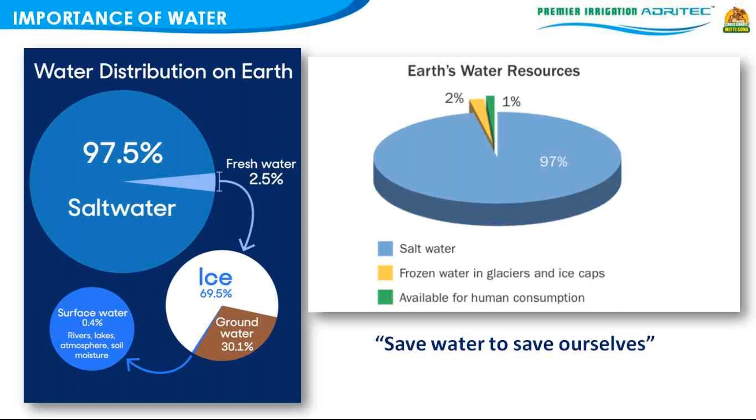So it becomes very important that we have to save water to save ourselves. This slide shows how little water we actually have. We have a lot of salt water, but can they be used? They cannot be used - we have to desalinate it, and it is a very costly process. So what we are trying to say is that the available water is very, very minuscule.

So what is the challenge now in water availability? As you can see from the map of India, in the Indian context, we find 54% of India faces very high to extreme high water stress. You can note down the various baseline water stress figures - this is sourced from the World Resources Institute. You will find that many states are in the extremely high category of water extraction, meaning the withdrawal of water either by tube well, bore well, or any other way, for drinking water or for irrigation.

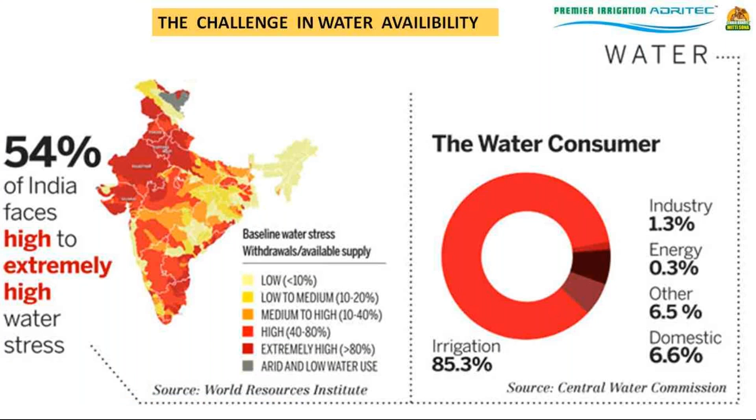When we look at who is the major consumer of this 1% water, you will find that irrigation - according to statistics from the Central Water Commission - accounts for 85%, or 85.3%, of water usage. So again, we see the pressing demand for irrigation. So what is the need of the hour?

I will go back in time and tell you how this whole thing happened. In the year 2003, under the chairmanship of then Chief Minister of Andhra Pradesh, Chandrababu Naidu Garu, a task force committee was set up for a Vision 2020, and it was thought that we should have a smart use of water - which is now very fondly called the Pradhan Mantri Krishi Sinchayee Yojana. So basically, the objective is that the available water has to be used very smartly.

On one side the population is increasing, and by 2030 India's population will overtake China. So the increasing need for food will also be very high, and the availability of water is coming down. These are contrasting situations. From the same given piece of land, I will have to increase my agriculture, give inputs, and also deal with the problem of power and labor, which all of us know.

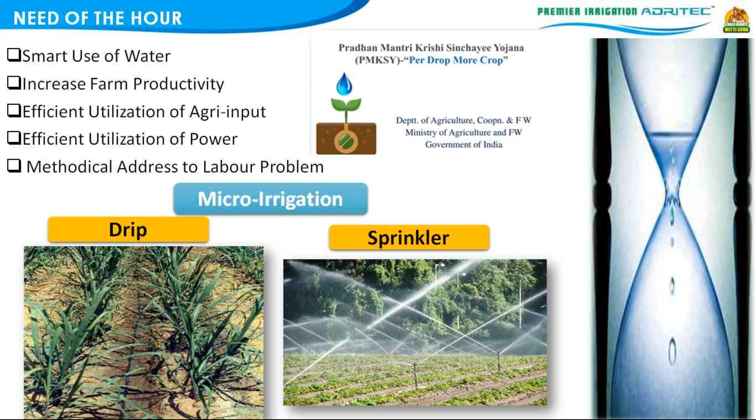So the government of India, under this scheme, decided that unless we use this water very carefully, we need the scope of micro irrigation. Micro irrigation is a very broad term which broadly covers drip and sprinkler irrigation. So this is the context of the whole need of the hour that is there today.

Now I will take you through the simple definition of irrigation. All of us are aware how water is lost from the plant. There are two basic processes, which we have all learned in 7th or 8th standard biology, by which water is lost.

One is transpiration, which happens from the leaves of the plant. There are small openings called stomata under the leaves, and water actually goes out through them. On a sunny day, the water is getting transpired, and surrounding the plant, from the soil, there is evaporation. Both of these put together is classically called evapotranspiration.

So basically some amount of water is going out, a major amount from the leaves, and water is lost from the soil. Put together, this is called evapotranspiration. This is the water that is going out.

Now the question comes: where do I give the water? Do I irrigate the soil, or do I irrigate the roots? The answer is of course obvious, that we have to irrigate the roots. That is the whole context of creating a water balance.

In a country like the UK, where you have rainfall for 10 months in a year, rainfall will take care of irrigation needs. But in a country like India, where rainfall is there only in the two prominent monsoons, we have a very short gap of 50-55 or 60 days, within which, of course, there are exceptional years, and we have to maintain this balance.

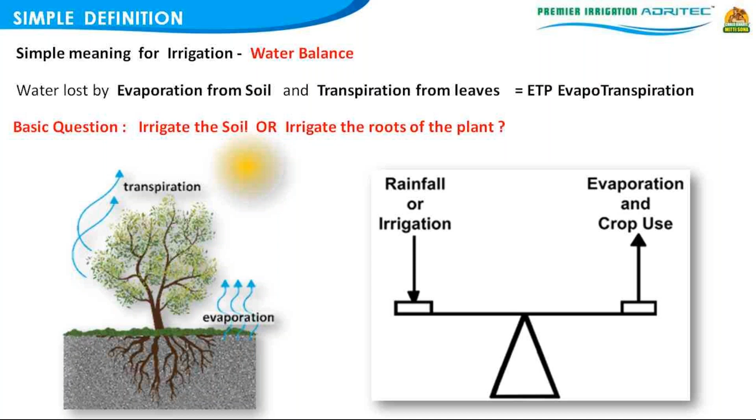So basically in irrigation we have to take care of the needs of the plant - whatever water is going out has to be given back. The plant cannot talk, so we have other indirect methods of finding out how much water is actually required by the plant. Now let us see what are the various irrigation methods and why we should adopt micro or drip irrigation.

There are many types of irrigation, but I am going to cover the main 5 which are very popular across the globe. I have left out pivot irrigation because it is not relevant to India as of now, except in a few places. The first most commonly adopted method is flood or surface irrigation, followed by sprinkler irrigation, then rain gun irrigation, then small devices called micro sprinklers or spray jets, and finally drip or trickle irrigation.

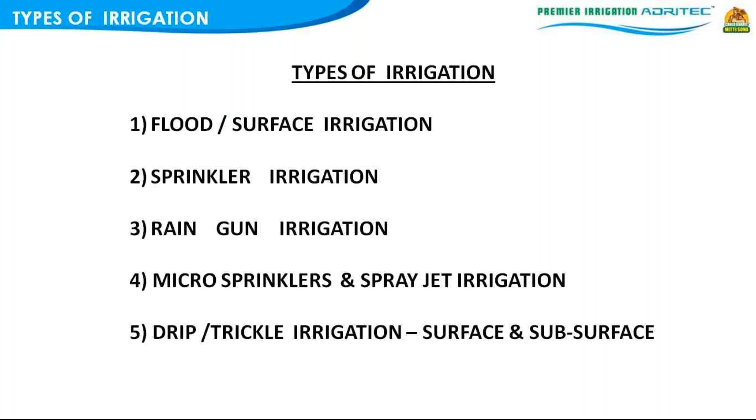This drip irrigation can either be laid on the surface, or it can be laid below the soil, 4 to 6 inches deep, depending on the active root zone.

So let us look at flood irrigation. The picture is very clear - there is a plant, and in the first one you are ponding the water around it. It is the common notion of anyone to think that the water has to be ponded around the plant.

Here the water is getting fully filled up in the basin, and you know the roots also have to breathe. So if you fill up the entire area with water, the water is actually ponded - you are giving it excess water. It's like a human being being asked to have an entire week's food in one day. Even here, when you look at the sugarcane field, you will find the entire area is being flooded. So what is happening over here?

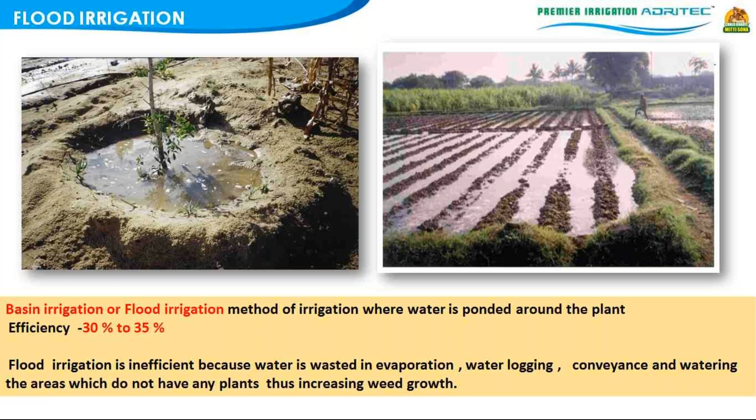You are wasting a lot of water by making it go through all these channels, by waterlogging, by deep percolation. What are the problems associated with this? First, you are wasting water, and you think the plant is getting a lot of water, but it's not getting a lot of water unless there's a balance between air and water space in the soil, it won't be able to take up the water. This also leads to a lot of weed growth, so when you do flood irrigation, you are also giving water to unwanted plants.

Next is sprinkler irrigation, a very important method popular worldwide. If you ask me which is the number one method of irrigation in the world, even today it's surface irrigation or gated methods. Second comes sprinkler irrigation. In this method, sprinklers are spaced at a certain distance apart, and the concept is that one sprinkler's water falls onto the head of the other sprinkler, so there is an overlap. The spacing between sprinklers is generally between 40 to 60 feet.

As you can see, the sprinkler has two nozzles: one throwing onto the far end and one throwing around the sprinkler. This method of throwing water for closely spaced crops has been found very efficient. The company I come from, Premier Irrigation, started sprinkler irrigation way back in 1965, and we were the first company to introduce sprinklers for coffee and tea, since a specific type of irrigation is required there, and the sprinkler is able to create what is nothing but a natural rainfall. The efficiency is between 70 to 75%. There's a 20-25% loss in the in-between spaces and due to wind effect.

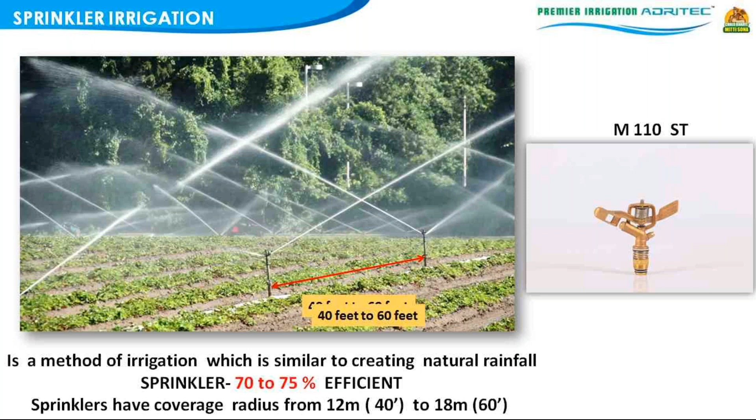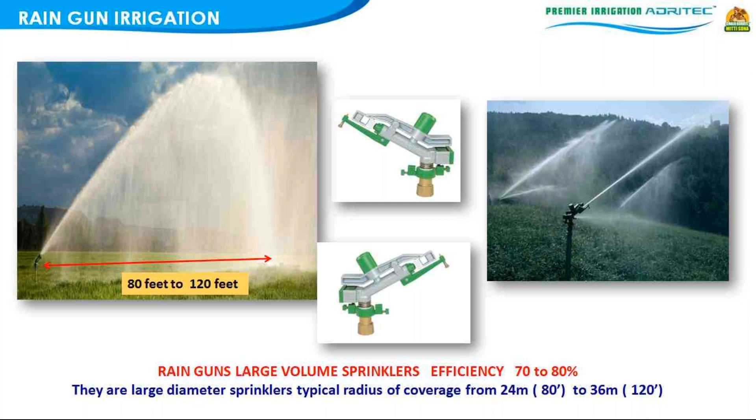Coming to the third method, you have a rain gun. A rain gun is nothing but a big sprinkler, also called a large volume sprinkler, and it can throw water a distance of 80 to 120 feet depending on the pressure available. How much pressure is required depends on the availability of water and the horsepower of the pump. The rain gun can cover an entire area, anywhere between 0.75 to 1 acre at a time, and the efficiency of this system is well designed. You can see it throws water almost in the form of rain, and the efficiency is between 70 to 80%. They are typically large diameter sprinklers, with the radius varying from 80 to 120 feet.

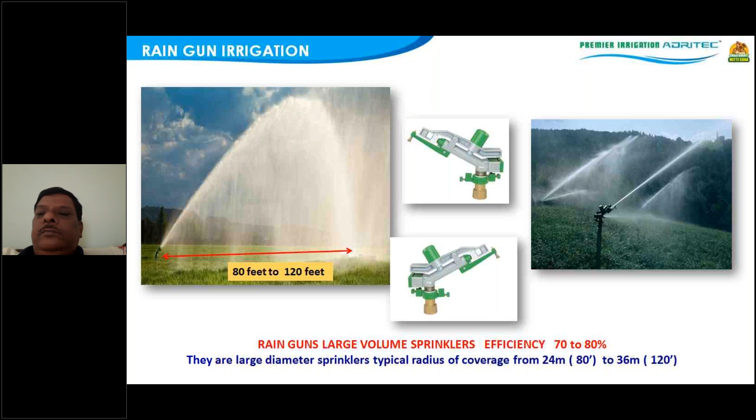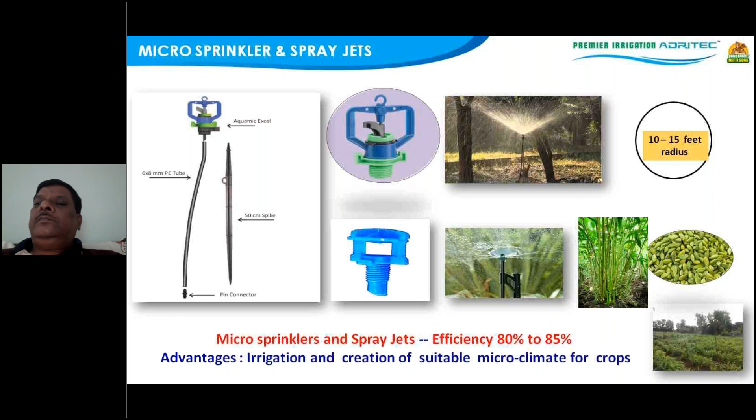Finally, we come to drip or trickle irrigation. As you can see here, there is a tube going in between the rows of vegetables or whatever crop or flowers are there. When the drip tubing is laid on the surface, it is called surface drip irrigation. The efficiency, as you can see, comes from watering exactly where the water is required, giving the water right at the root zone. So the efficiency is between 90 to 95%.

Today the latest in drip irrigation is to take this tube below the surface of the soil, anywhere between 4 to 6 inches. When we do that, even that small evaporation loss on the top is also conserved, and the efficiency can be as high as 95 to 98%. It's like giving an intravenous drip for a patient, where directly the glucose is injected into the system.

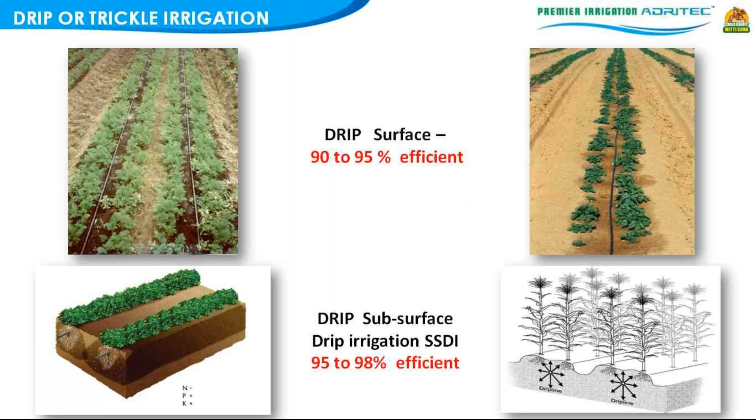So now you may be wondering what all this talk of efficiencies and methods is about. Let us summarize what we have learned till now.

We saw that flood irrigation has 30 to 35% efficiency. That means for every 100 liters of water supplied, only 35 liters has been used, and the balance is wasted. When we take the sprinkler, for every 100 liters, 70 to 80 liters are actually utilized by the plant for its metabolic needs. Rain gun is also between 70 to 80%.

Micro sprinkler is between 80 to 85%, and drip irrigation is around 90 to 95%. So what do we understand from this? Just looking at numbers will not help, so let us do a small math.

Let us take the drip irrigation efficiency as 90%, and compare it with flood. So 90 divided by 30 will be how much? 3. That means if the water available for 1 acre of flood can be used for 3 acres of drip. Let us do one more calculation.

Let us take sprinkler: it's 70 by 35, which will be 2. That means the water available for 1 acre of flood, the same water can cover an area of 2 acres. So this is the understanding of efficiency, and how with very little water, I will be able to irrigate a much larger area. This is the context of the efficiencies.

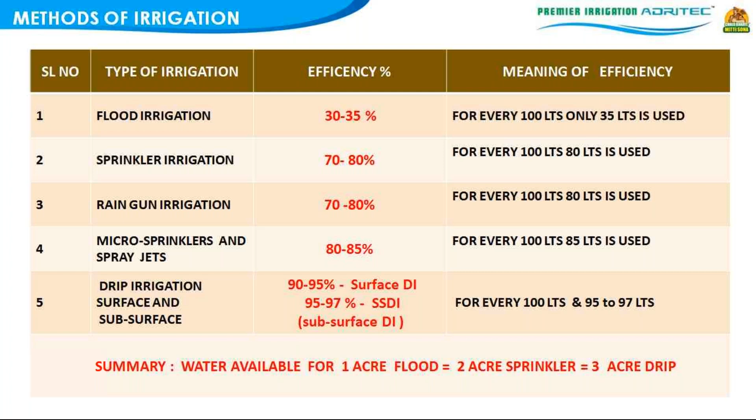Now what is drip irrigation? It is a very precise method to apply water, fertilizer and pesticides slowly, frequently and directly to the root zone of the crop. Please note the words: you have to apply it slowly, frequently and directly to the root zone of the crop.

When we look at the classification, we have two basic types of irrigation system based on the spacing of the crops. The first one is the inline drip irrigation system, which is very common for close space crops. Whenever the spacing is very close, like sugarcane, vegetable, turmeric, cotton, maize, banana, papaya, or even today rice and wheat, on all these crops where the row spacing is very close, we go for what is called an inline.

Inline drip irrigation means there will be a tube where the dripper is co-extruded and manufactured, and the dripper is inside the tubing. This is called an inline drip irrigation system. We have two varieties: the cylindrical type and the flat type of emitters. There are two types of emitters.

Now when we come to the online drip irrigation system, as the name suggests, you will have this tube, and from the tube you take an extension, and then you fit the drippers around the root volume of the crop. This is generally preferred for wide space crops.

You can understand, if I'm going to use inline for a wide space crop like coconut, which is say 25 feet by 25 feet, I am going to water the in-between area unnecessarily, unless I have an intercrop. If I have an intercrop of vegetable, then it is okay, but if not, then I'm going to be wasting the water. So here I will be giving a point source irrigation, called online drip irrigation, which is very common for coconut, arecanut, mango, citrus, pomegranate.

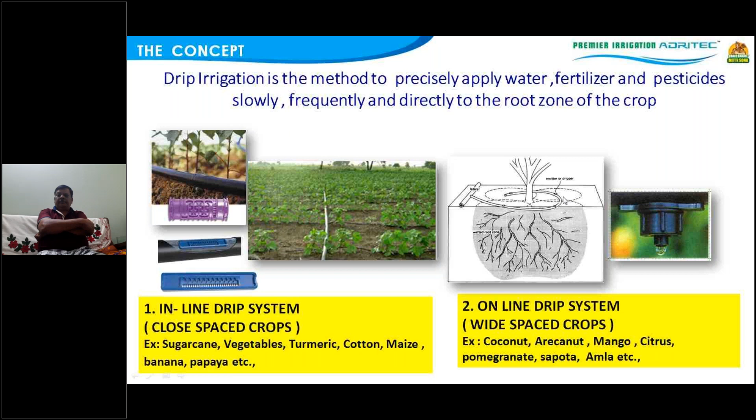So what is the difference between inline and online? Inline means the dripper will be a part of the tubing. Online means you will have the tubing and you will put the emitters separately. Typically anywhere between 3 to 4 emitters are provided.

Now what are the benefits of drip irrigation? First is water saving, second is fertilizer saving, third is increase in yield, then reduction in weed growth, and then energy power saving and infrastructure, which is nothing but manpower saving. Let us look at these by means of simple photographs.

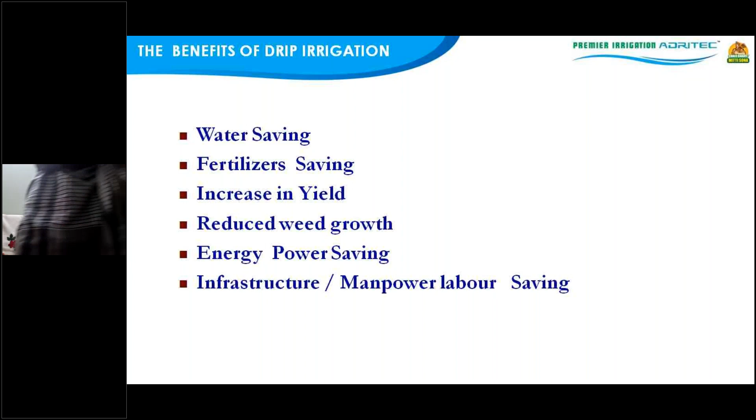So this is the water saving. It has been proved world over, and India particularly is the leading country as far as adoption of micro irrigation after Israel. You will find the water saving is anywhere between 50 to 90%. And you will also note that if you want to take the best advantage of a drip irrigation or micro irrigation system, you will have to apply the water soluble fertilizers also through the drip system.

In the conventional method of broadcasting fertilizer, you are going to throw it even to the weeds or to adjoining areas where it is not required. By applying water, fertilizer and even pesticides directly, the quantum of fertilizer that needs to be applied can be reduced, because in broadcasting there is wastage and you end up increasing your quantity by some percentage. So it has been proved that around 15 to 35% of fertilizer saving also happens.

Coming to the yield, this is related to the challenges of water depletion and increase in population. We have no choice. For example, your father or grandfather must have had 10 acres, then his sons made it 5 acres, and further it became 2 acres. So the land size is going on diminishing, and from the same area I have to increase my productivity.

So here drip irrigation or micro irrigation is a boon. It has been seen that anywhere from 30 to 60% advantage is gained in open conditions, and the weed growth will be definitely very much minimum. You can see the water is being applied.

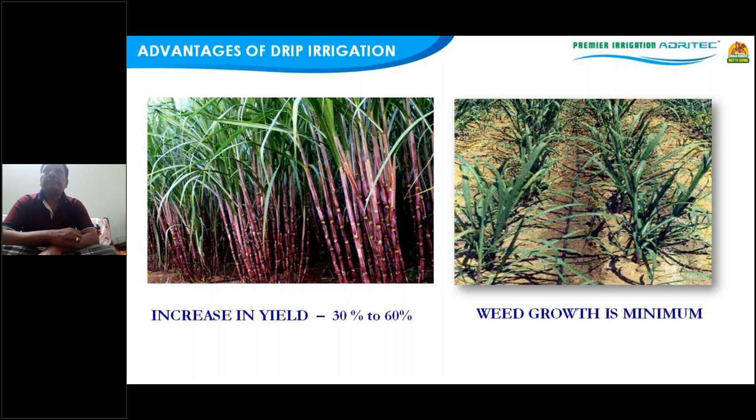So in a crop like sugarcane, if you do flood irrigation, you may get a yield of say 30 to 35 tons per acre. Whereas if you do drip irrigation with fertigation, yields as high as 70 to 80 tons have also been observed.

Another advantage of drip irrigation is that it is not affected by wind. We all know sprinklers have one disadvantage: when the sprinkler rotates and there is a heavy wind condition, the wind will push the water flow towards one side. But that is not there with drip because the lines are at the bottom, so there is no problem.

And this is one advantage which not many people are aware of: drip irrigation can be used with saline and recycled water, and even for saline soil. In fact, it will make your saline soil better.

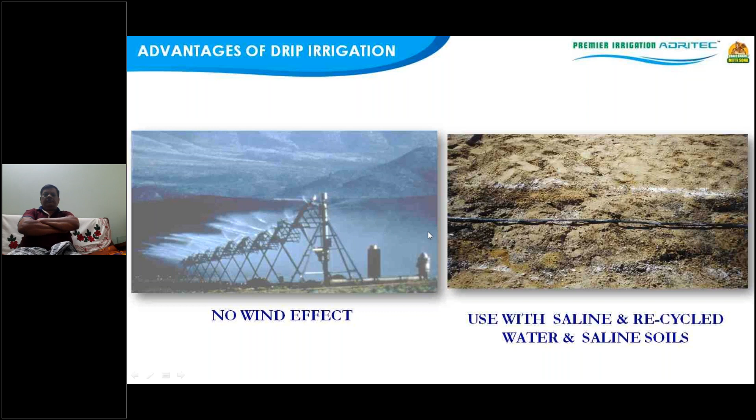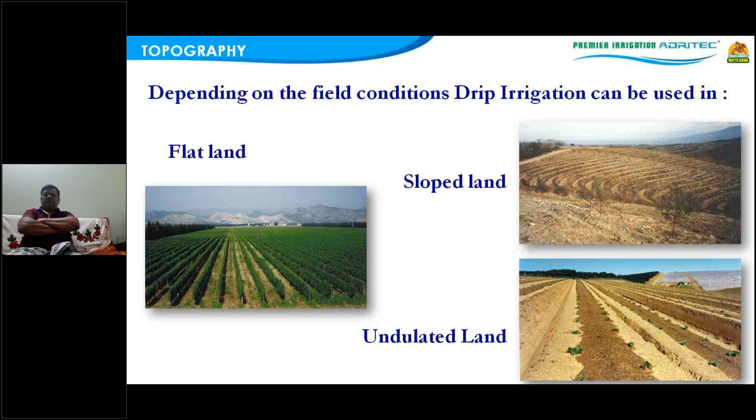So these are some of the bigger advantages. Finally, whether you have a flat land, a sloping land, or an undulated land, any land condition is not a challenge for drip irrigation. If you have to do flood irrigation, you have to terrace it, take the water to the highest part and then allow it to flow down by gravity. That issue is not there because you have a pumping system, and from the pumping system the entire water will flow as required. So that is another plus of drip irrigation.

Okay, so till now we saw the importance of water and the advantages of drip irrigation. Now let us look at a typical drip irrigation system. A typical drip irrigation system has got three main parts.

The first part, which is very close to the pump or the water source, is called the head control system, or very commonly called the filter station. There are a number of components here which I will explain as I go along.

After that, since drip irrigation outlets have very small nozzles, the water coming out has to be filtered. Otherwise, particles present in the water, whether sand or organic impurities like algae, will come and block the drip system. So filtration becomes a very important part.

Filtration is basically the heart of the system, and from there the water gets into the main line and the sub main line. That is called the water carrying system. The water from the filtration is carried into the main and sub main line system, and from the sub main line system it gets distributed into the tubing.

So the water is pumped, passes through a filter, then you have a main and sub main line, and from this sub main line you have lateral lines made of LLDPE, or linear low density polyethylene, and from the lateral lines the emitters are fixed to the root zone. So you can see how the entire system gets water.

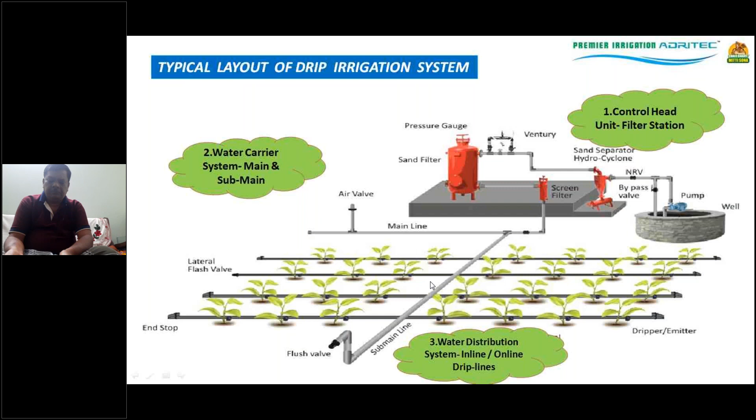This is just one small representation. So how does it actually look in the field? I've given you a schematic. So what are the components which have been laid down by the Government of India?

You will notice this is the borewell, and from the borewell the water passes through a number of components. First you have a non-return valve. What is a non-return valve?

When you pump out this borewell water, and since you apply water soluble fertilizer through the drip irrigation system, as you see through this bucket, we would never want this fertilizer water to get back into the borewell. So we have to have a valve which will prevent the backflow. A non-return valve allows water to flow only in the forward direction and not in reverse. That is the first safety device.

After that you have what is called an air release valve. When the pump has not started, there is air in the pipeline. That air has to come out, and for that you need an outlet, which is provided by this air release valve. Only after the air gets released will the water enter into the pipeline system.

Next is a bypass assembly. You may ask, what is the need for a bypass? Whenever you have excess water in your system, or excess horsepower, you don't want that excess water to get into the system, because it could increase the pressure and damage some of the components. So we provide what is called a bypass.

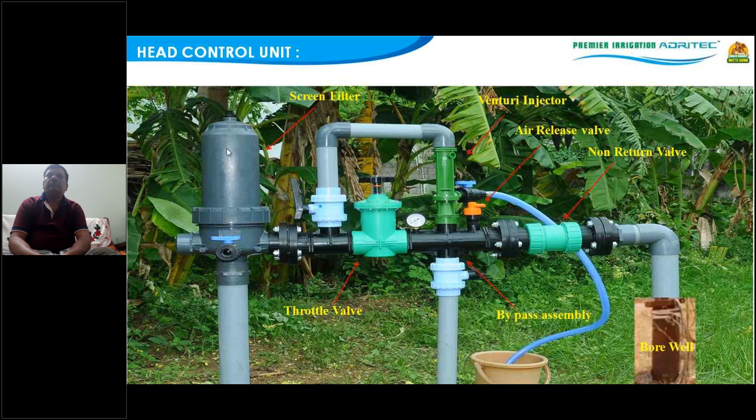Finally, since water soluble fertilizers or pesticides may not be 100% water soluble, if there are any leftover impurities, the water has to be passed through a basic screen or mesh filter. So this is the basic head control unit for a typical farm. Now let us look at the components that are actually there.

So the non-return valve is a very simple valve. Its function, as I told you, is to prevent the backflow of the water soluble fertilizer back into the water source, that's number one.

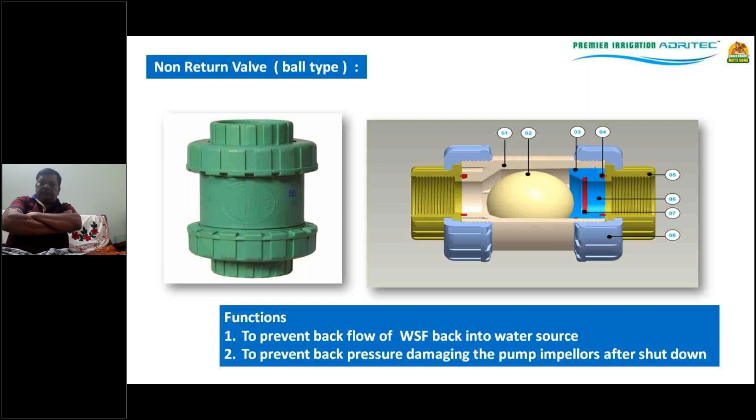If the plot is at a higher elevation and your borewell or open well is at a lower location, what happens when you switch off the pump? The entire water rushes back, and this creates pressure onto the impeller of the pump, which gets damaged in the long run. So providing a non-return valve prevents the back pressure from damaging the pump impellers after shutdown. It's just a one-way arrangement using a ball that's there inside.

Next is the air release or vacuum release valve, which is the second safety device. Its first function is to release the air from the pipeline, because when you switch on the motor, the air has to first come out.

Even in your house, you would have noticed on top of your tank there are two pipes. You have a stand pipe which releases the air. Only once the air is released does water get into the system. You would have noticed that when you clean the tank, it takes some time for water to start at the tap again, because the air gets locked, and that air locking has to get cleared.

So an air release or vacuum release valve releases the air during pump startup. It has another important function too. When you shut off the system, the difference in pressure between the outside and inside of the pipe creates a negative pressure inside, meaning you get a vacuum.

To break the vacuum, there's a ball that moves up and down. First, this ball is in the bottom position. When the water starts filling up, it goes and locks up, and once full, with all the air released, it closes. When you shut off, the ball automatically comes down and allows outside air to come inside, balancing the pressure between outside and inside.

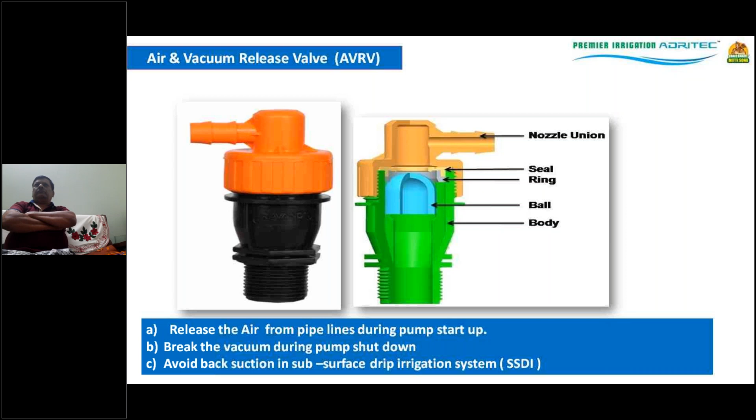We also provide these air release cum vacuum breaker valves in subsurface drip irrigation, because the drip line is actually going inside the soil. When the system is switched off, there's a possibility of mud and other particles entering the drip line in a subsurface setup. To prevent that, we provide these extra air release cum vacuum breaker valves.

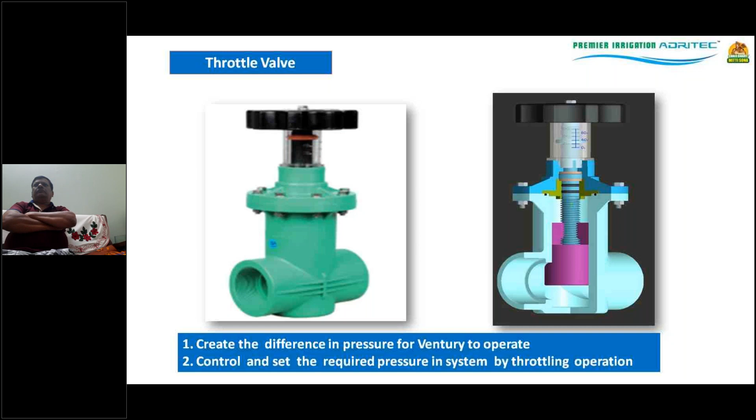Now for the control of the system, to create the difference in pressure for the venturi to operate and to set the required pressure - every system, whether sprinkler or drip, requires a certain pressure, like 1.5 kg at the start. To set that pressure, you need a valve. This throttle valve has two functions: it creates the difference in pressure for the venturi to operate, and it sets the required pressure for the system's operation.

The third is the venturi, which you've seen in the whole system. We give it as a manifold arrangement, and here we create the difference in pressure. As you can see, when we throttle it, you get a difference in pressure. Typically we have two sizes of venturi: a 1-inch venturi and a 2-inch venturi.

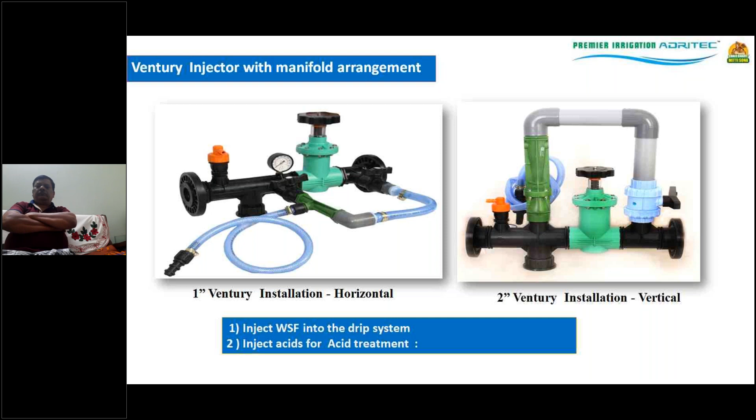The function of the venturi is basically to inject water soluble fertilizers into the drip system. Also, even though we provide filters and everything, there are still dissolved salts in the water that tend to clog the emitters. So periodic maintenance of the drip system is required, for which we do what is called acid injection - a mild acid, preferably hydrochloric acid or phosphoric acid, is injected. And to inject that acid too, we require this venturi.

So now you have seen all the head control units, and then we will come now into the basic drip line. So basically, after the water has passed the filtration, the water is coming into the drip line. This is the inline drip irrigation system, which is very commonly used for vegetables and other close space crops.

This is available in various sizes like 12 millimeters, 16 millimeters, various wall thicknesses like class 1, class 2, and different diameters, even 20 mm is also available.

One very important feature of this product from Premier is that there are 4 holes in the emitter outlet. You might be wondering why we have given 4 holes. You know that there is going to be clogging by salt, so even if 3 holes are clogged, even 2 or more holes are clogged, still the water will come out at the exact quantity.

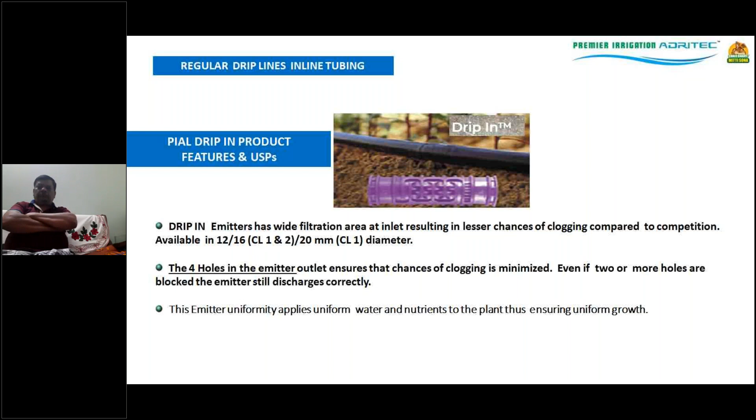I want you to understand this dripper can work at a wide operating range, for example, half a kg pressure right up to 2 kg pressure. What is the implication of this? For example, in a borewell, during the summer the water levels will drop and the pressure will also come down. Even in such a condition, our dripper will be able to give you water.

Even at half a kg pressure, it will still be able to give you about 3 liters. And after the rains, if the water level is higher, the pressure is going to be higher, we'll still get a higher discharge. Then you may ask, how do I control the discharge? What I will do is play around with time. I will increase my irrigation time duration during the summer, and during the rainy months I will actually cut it down. When it is fully raining, of course it's not required.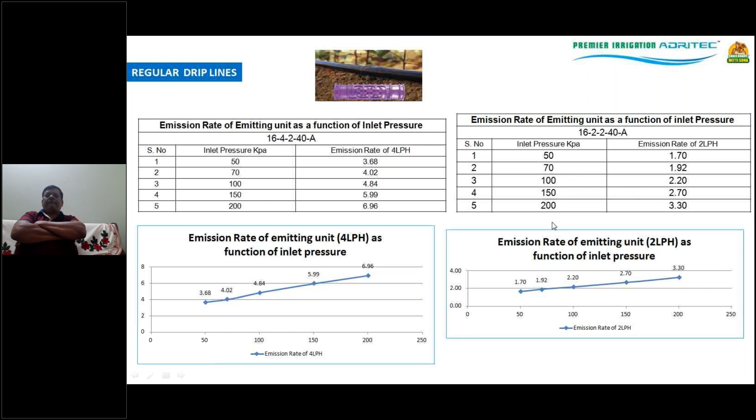The second, similarly, we will see that there are drippers which are smaller in shape. This is again an inline drip irrigation system where you have 2 outlets instead of 1. Here also we can give you 2 liters and 4 liters. Again the dripper is co-extruded as a part of the system, and the water will start trickling out.

So we can give you very cost-effective options from a low wall thickness to a high wall thickness. We have products which will last for 2 seasons, 3 seasons, 5 seasons, and as per the Government of India regulation, it has to last a minimum of 5 years. So all these varieties of products are available.

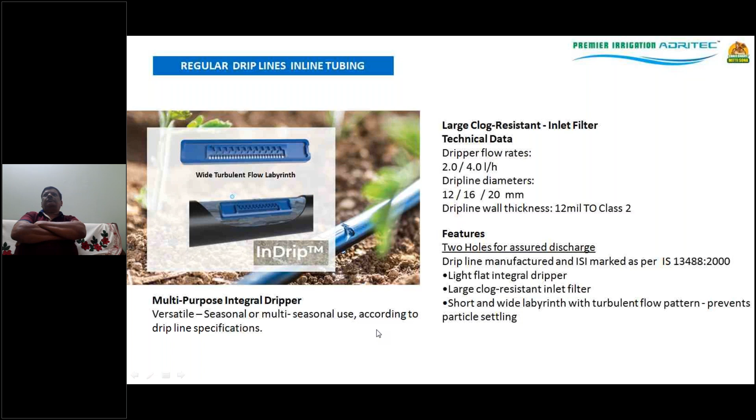The tubing thickness will vary. Here you can see how the water enters through a wide labyrinth or filter area, then gets into the labyrinth where the water flow gets regulated, and the water starts coming out in the form of a droplet. This is the second type of inline drip irrigation tubing.

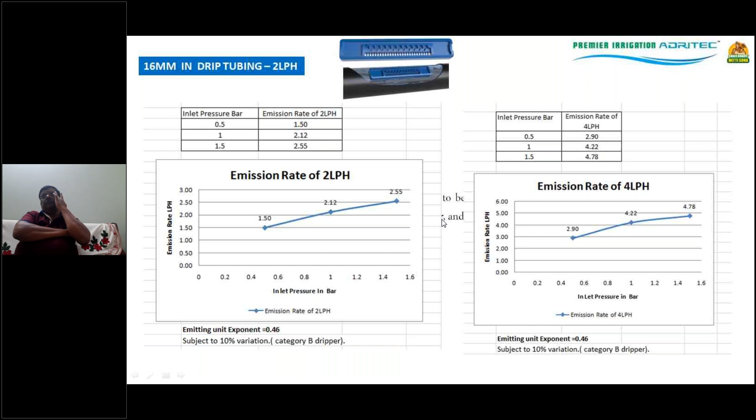Again, this is the same graph. As you will always know, you have a wide range of operating pressure. So even in low summer conditions and high rainy conditions, the dripper is still able to function, and you can see the performance characteristics, very similar to what I told you about the other product.

Now coming to the wide-spaced crops I mentioned, where I was talking about the online drip irrigation system - this is a photograph of dragon fruit cultivation. You can see how the drip line is laid in the form of a loop, and around this loop at 4 points, because there are 4 dragon fruit cactus climbing up this support.

So at four different points, you give 4 emitters. This is called online - the dripper is actually punched on the line, that's why it's called an online drip irrigation system. Here also, typically for a drip irrigation system, the recommended pressure at the inlet of the emitter is around 1 kg or 1 bar. This particular product, the TABE emitter or take-apart button emitter, gives around 4 liters. This photograph is courtesy of a newspaper article on dragon fruit cultivation by The Hindu - I thank them for this photograph.

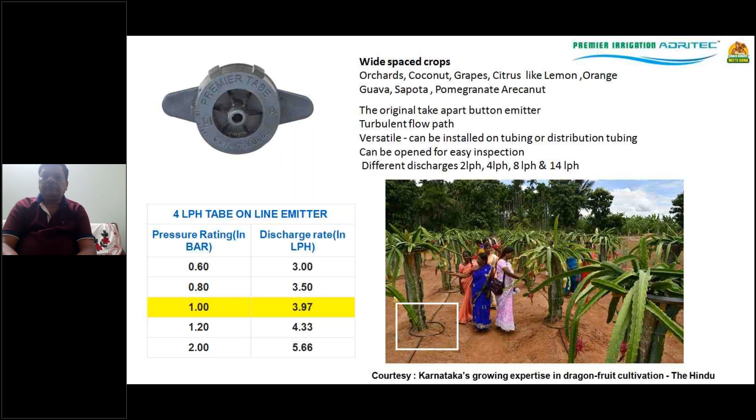Now let's look at filtration. We've seen the tubing, now I'll go into more detail on the types of filters. You know we have different water sources - bore well, open well, lake, reservoir. Based on water quality and condition, we have different horsepower pumps, starting from a very small 1 horsepower giving about 5,000-6,000 liters, up to a very big pump giving 40,000 liters.

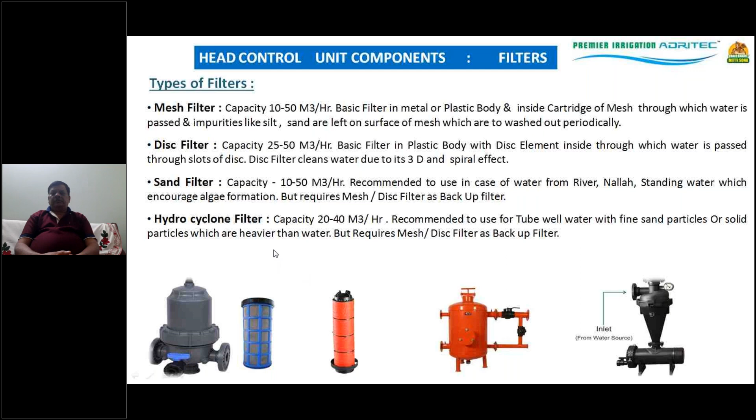So we have different filters, broadly classified into a mesh filter, which you see in the first photograph, then the disc filter, then the sand filter, and finally the hydrocyclone filter. Now let us get into the detail of this.

The mesh filter is the most basic filter, and it's basically a 2-dimensional filter. What is there inside? You have a plastic cartridge, and the water gets filtered. Water enters and gets filtered on the surface. This is actually a PVC or engineering plastic cartridge on which you have a stainless steel mesh. This is very simple to clean - all you need to do is rinse out this mesh in a bucket of water.

It's available in various capacities starting from 10 meter cube. 1 meter cube is actually 1000 liters per hour - sorry, 10,000 liters per hour. That means in 1 hour, this filter can filter about 10,000 liters. Depending on the outlet available at your pump, whether it's a 2-inch, 2.5-inch, or 3-inch outlet, various sizes are available. This is generally recommended for a borewell which has very minimum silt, and typically for an online drip irrigation system.

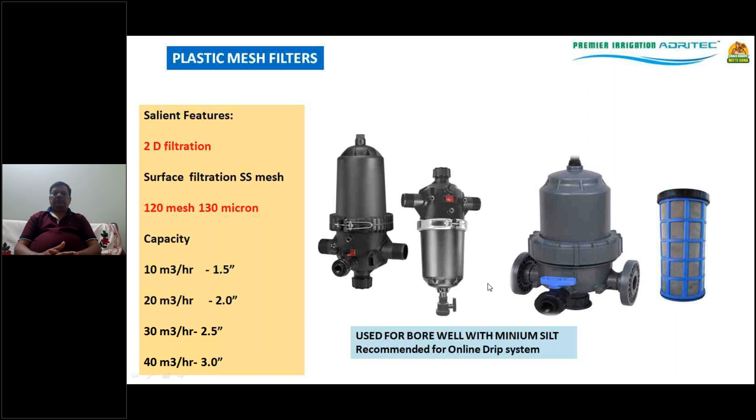The second, more advanced category of filter is the disc filter. Here, instead of a steel cartridge, you have what is called a disc - a ring-type structure which has grooves on it. Typically there are about 300 such rings, one sitting over the other, and in between the grooves the helix is there, and the water gets filtered on the surface as well as through the depth.

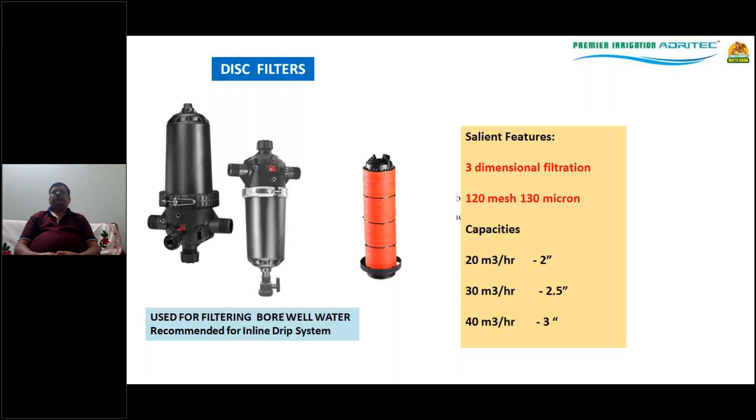So that is how the filtration is happening. This is basically a superior filter, slightly expensive, and it's generally recommended for the inline drip irrigation system. As you know, in the inline drip irrigation system, the inline emitters are inside the tube and cannot be removed and cleaned, so utmost care should be taken to give a good filter.

Then comes the sand filter. Whenever you have an open water source, you have another challenge: the challenge of algae and organic impurities. So a sand filter is basically a media filter where inside you have silica sand, and the water passes through it before going to a basic filter. When you want the filter to operate, I open valve number 1 and valve number 3, and shut off valve number 4 and valve number 2, and the water goes through the silica.

The silica is sharp-edged, and it makes the organic impurities get stuck between the layers of silica. Then it passes through a screen filter. That is the basic operation. After some time, the algae will start getting collected on top.

That has to be cleaned, so I reverse the water operation. I close valve 1 and valve 3, and make the water flow from bottom to top to allow all the algae to come out. Keep in mind valve number 4 should be partially open, not fully open, otherwise the entire silica media will also come out.

So this sand filter is used to remove algae and organic impurities, and it's never given independently — after this you have to provide either a screen filter or a disc filter. Now, another challenge is that everywhere the depth of the borewell is going deeper, and you'll find a lot of silt coming in. If I provide a basic filter, it will get blocked in some 15-20 minutes. So what do I do in such a case?

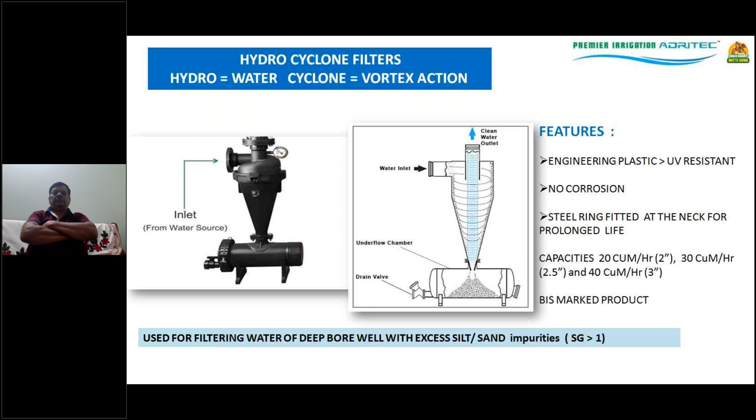But one thing to note is that for these particles to settle down, their specific gravity has to be more than 1. In some borewells you get very fine mica which actually floats on water — for that, the hydrocyclone filter will not work, and you will have to go for a sand filter instead. So these are the two challenging situations the farmer is forced to face.

This chart summarizes the entire water source situation — what is the water source, and what is the type of impurity? For example, for a borewell with minimal silt and sand particles, I will go either for a screen filter for an online drip irrigation system, or a disc filter for an inline drip irrigation system.

If it is a deep borewell with a lot of silt coming in, or a river source, I will first give the hydrocyclone filter and back it up with a mesh filter or a disc filter, depending on whether it's online or inline. If you have an open water source like a river, pond, lake or stream with algae and organic matter, I will go for a combination of sand filter followed by the disc filter. And if you have more silt particles also coming in, I will use a triple filter: first the hydrocyclone, followed by a sand filter, and then the mesh or disc filter.

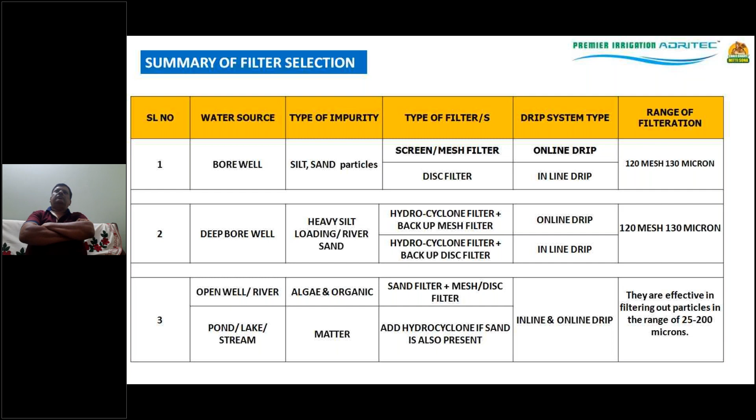This chart summarizes this thing. Why we are emphasizing so much on filtration is that filtration is like the heart of the human being. If you don't take adequate care over here, the life of the system will be drastically reduced. So utmost care must be taken in the selection of the filtration system based on the quality of the water.

That is available. Now coming to the venturi, let me get a little deeper into this part. The venturi has two main purposes. One is fertigation - the water soluble fertilizer has to be applied into the drip system to get the best efficiency, because not only does water have to be applied uniformly, we need the fertilizers to be applied uniformly too. So you have both the 1 inch and the 2 inch, with different capacities.

And just to give you a little insight - where should I use a 1 inch or a 2 inch? Before that, let me explain how the venturi works.

If people know about Bernoulli's principle, you will note that if there is a pressure difference between the inlet and the outlet, then what happens? Inside the venturi, if you look at the construction, you have a larger inlet and a constricted portion through which the fertilizer gets injected. How does that happen? Because of suction.

You can imagine I'm having a glass of juice and I would like to drink it. I can either drink it directly or I can put a straw and suck it. In exactly the same way, by suctional pressure, this fertilizer gets injected into the drip system. This is available in 1 inch and 2 inch sizes.

Generally a 1 inch venturi will inject anywhere between 150 to 270 liters. So let us look at it from the farmer's viewpoint. If I have a 100-liter drum, within about half an hour I can inject the entire fertilizer. If I have a 2-inch venturi, that will get injected in 15 minutes.

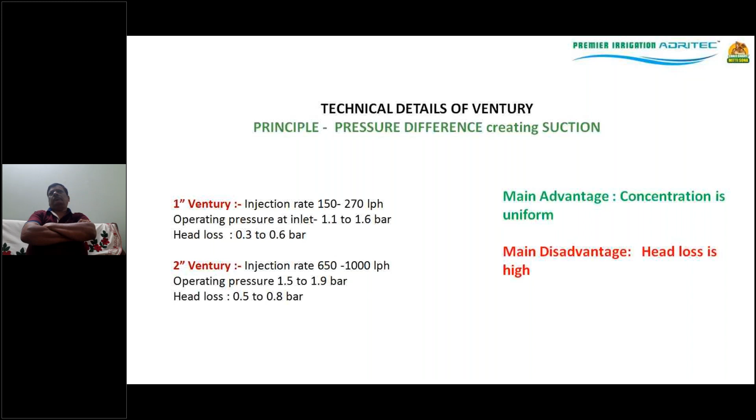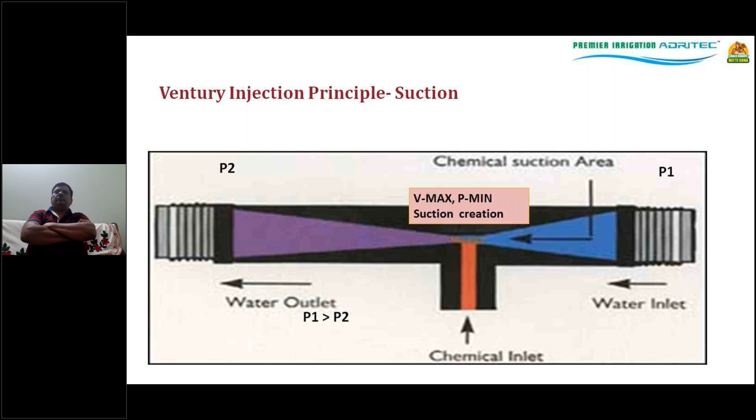Of course, these days we have made improvements in the cross section and design of the venturi, and these are very beautifully designed now, so even the head loss is taken care of. It used to be around 7-8 meters, now it has come down to 4 meters. The design has been suitably modified, so this disadvantage has been covered up.

Now, after looking at all the major components, I want to take up a case study from a farmer in Budigere, Devanahalli, which is not very far away from here. Budigere comes in Bangalore rural district. So what was the problem over there?

I'm talking about when I joined this line, way back in 1992. The farmer had 6 acres of land and had drilled 2 borewells. One borewell failed after drilling - there was no water. To his bad luck, the second borewell gave only 300 gallons of water, which is roughly around 1362 liters. 1 gallon is nothing but 4.5 liters.

And how was the water coming? It was an intermittent supply. I would get water for 2 hours, then have a gap of 1 hour, and overall I would not get water for more than 12 hours. Another problem he had was that power was available - proper 3-phase was available only at night. And he had used a compressor motor because the water was not coming continuously, it would come in spurts.

So that means if I look at the water available to him for 12 hours at 1362 liters per hour, that's only 16,344 liters per day. But he had a big ambitious plan. What was his plan?

He had a 6-acre land and he said, I want to do 3 acres of coconut, around 145 plants at a 30 feet by 30 feet spacing, with guava as an intercrop, 15 feet by 15, around 435 plants. And the other 3 acres I will have banana, around 3,600 plants.

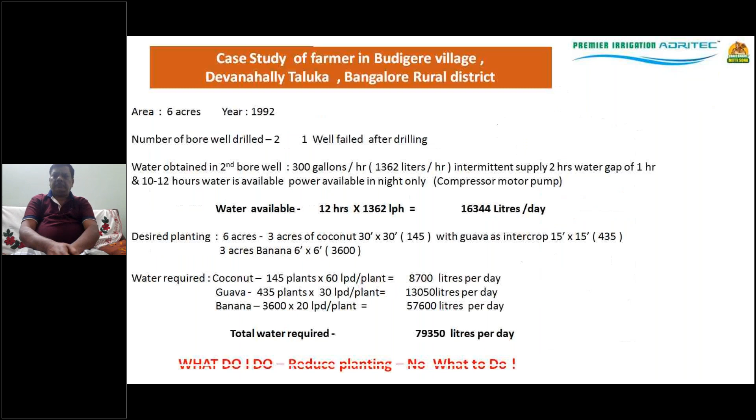I'm talking about a case from 1992. Most farmers are aware of it now. What they do is have a number of borewells feeding a centralized system - if 1, 2, 3, or 4 borewells are there, it's all dumped into one centralized area, also called a Krishi Honda. From there you put in another pump and do drip irrigation for the entire area. This is how the farmer at that time went in for drip irrigation back in 1992, and was able to irrigate 6 acres with a very small quantity of water of 300 gallons per hour.

This was the success we saw, and most farmers understand this reality now. Drip irrigation has caught on very well, and particularly Karnataka is one of the leading states, with more than 12-13% of the area already covered under drip, and further growing.

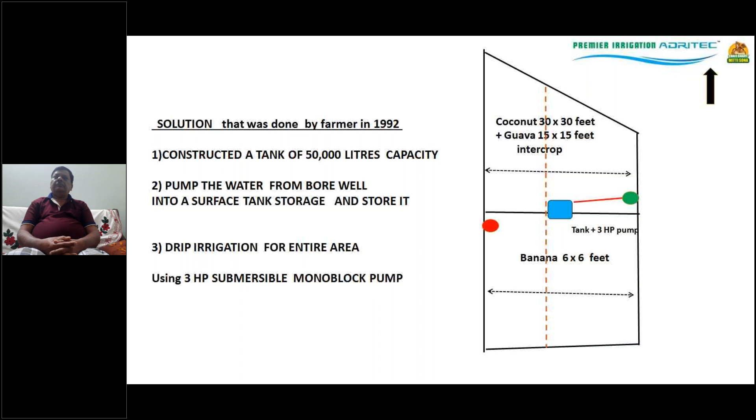Now, one small point: whenever we do dripper selection, we have to take a lot of care on the type of soil involved. You must understand how water moves in the soil. In case of sandy soil, because there is a lot of pore space, the water will directly go down - the vertical movement will be greater than the horizontal movement. So the water spreading will not be more than 1.5 to 2 feet.

Whereas in case of a medium soil, like loamy soil or red soil, you will have both horizontal and vertical movement, and the spread is anywhere between 2.5 to 3 feet. And if it's black cotton or clay soil, the spread can be anywhere between 3 to 3.5 feet. So depending on the type of soil, we have to select the emitter spacing of the inline.

This is a very important aspect I want all farmers to take care of. Whenever you have sandy soil, go for a 30 to 40 centimeter emitter spacing between drippers. If it's loamy soil, you can have it slightly wider apart because of this bulb - between 40 and 50 centimeters. And for clay soil, you can have it between 50 to 60 centimeters. All these are factory manufactured by our company, and we can give you whatever spacing is needed. These are the standard spacings adopted, and after the survey, we are able to determine it.

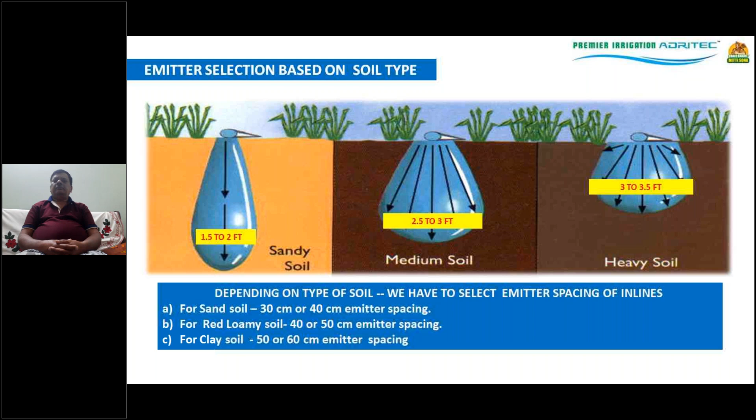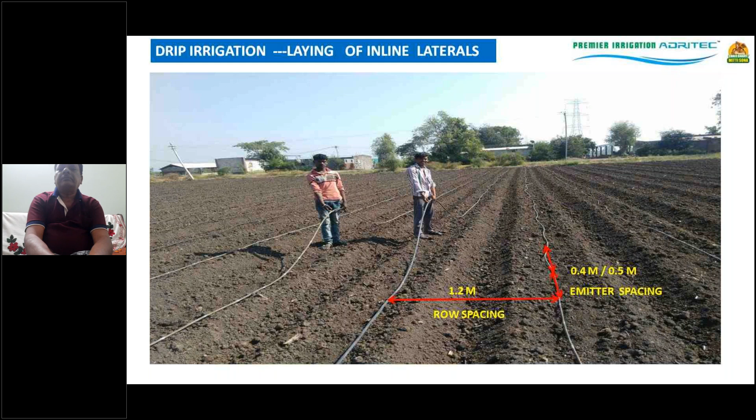In addition to micro irrigation, we also manufacture sprinklers. Sprinklers have got some peculiar advantages - in addition to creating artificial rain, cleaning of the leaves, and local microclimatic control, it is also very useful in germination. Drip irrigation has got a drawback that germination will not be that quick if the plants are very close by. So sprinkler irrigation is a common practice even in countries like Israel - in the initial part they will use a portable sprinkler system and follow it up with a drip irrigation system.

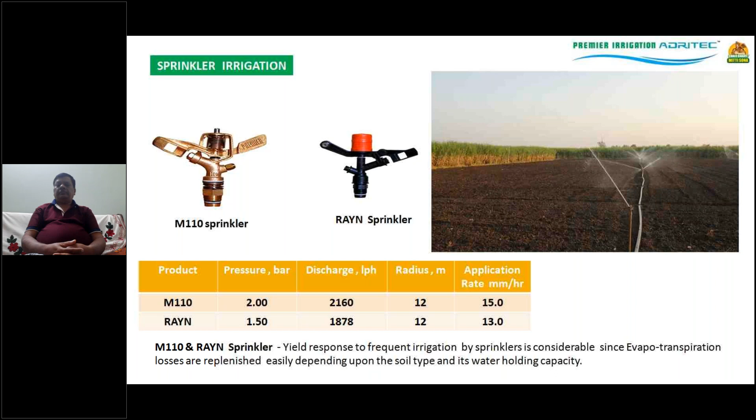Sprinklers basically come in 2 models - one is the metal model and one is the plastic, engineering plastic model, with different specifications, which I won't get into. Basically, after every 2 pipes you are going to fit one sprinkler - every 40 feet, since a standard pipe comes in a standard length of 6 meters or 20 feet. The water of one sprinkler head should hit the head of the other sprinkler, so that there is a total overlap and all the area gets covered. So this is about the sprinkler part.

And you have rain gun irrigation, which is also very popular - of course you require a higher horsepower for it. These rain guns are typically used for fodder grass, for lawns, for dust suppression, and there are advantages and disadvantages. It's creating artificial rain, and particularly for football stadiums and sports stadiums, before and after the match you want dust suppression to happen - that also can be done. When playing on artificial turf, electrostatic force develops in the grass, and to neutralize it, they generally go for irrigation either with rain guns or with sprinklers.

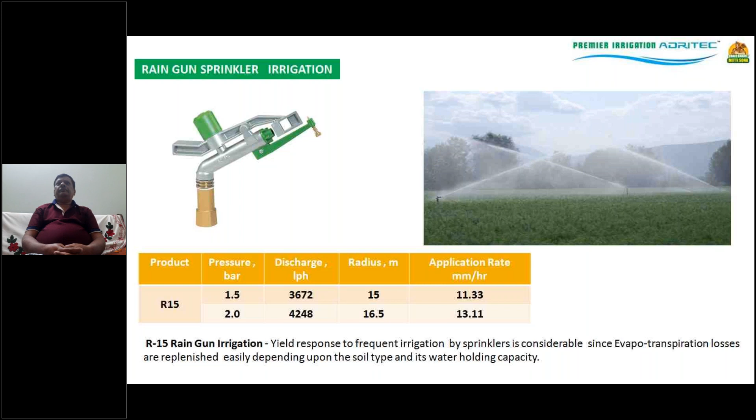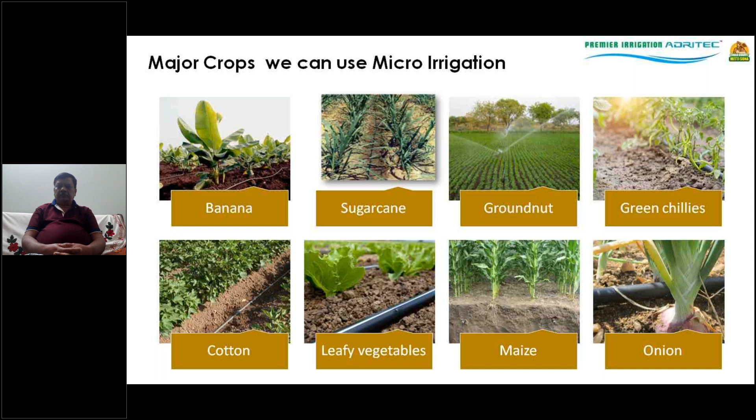So these are some of the interventions that are there - the micro irrigation, the drip, sprinkler and rain gun irrigation. Now let us look at the crops - you name the crop: banana, sugarcane, groundnut, chilies, cotton, vegetables, maize, onion - and today we can use micro irrigation for any of these crops. Let it be papaya, tomatoes, citrus, turmeric, guava, brinjal, mangoes, cucurbits - you name the crop. Even drip irrigation on paddy is very much in practice, but of course it is still in the experimental stage.

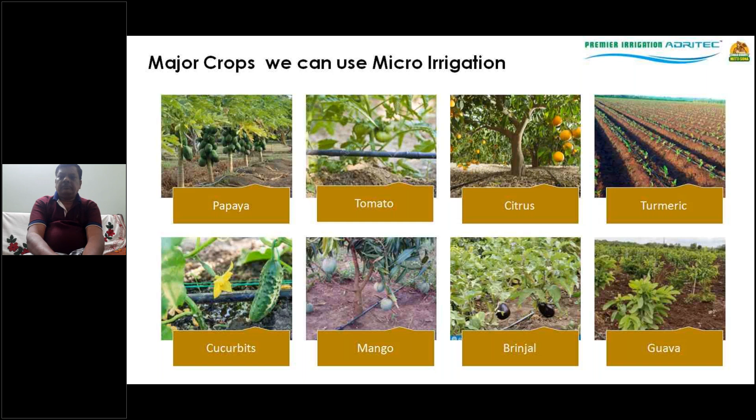And now there are a lot of new crops like dragon fruit and so many other high value horticulture crops, both in open field and greenhouse conditions or protected cultivation, where micro irrigation can be advantageously used. Thank you very much for the opportunity given, and thank you for the patience and hearing. With this I close my session, and I'm open to questions from the audience.